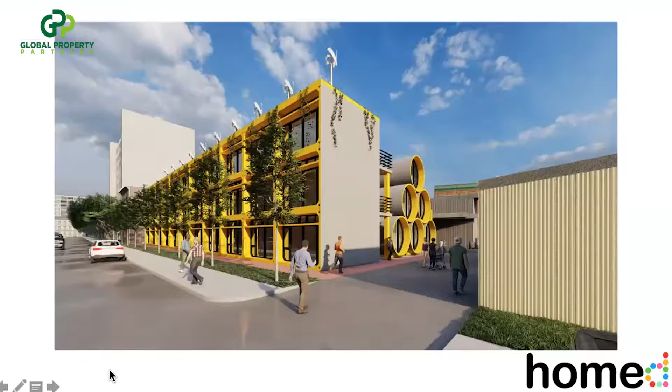Can you see? Right, can you see? No. These courtyard spaces are at the heart of the community. Can you see now? No, you cannot see. We can't see. Can you see this next one? You can't see - maybe you have to refresh your slide. Can you see this one now? You can't see, maybe you have to refresh. Okay, let me stop and then share again. We missed a lot of the slide. Now we are seeing. You might have to run through from the beginning, kind of summarize. Okay, well I think it's the internet speed that's precluding us from showing it smoothly.

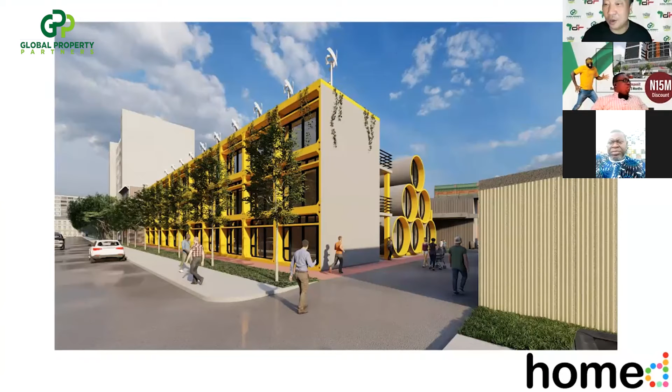But this is another project we're doing in Vancouver. This one is a project that involves a women's charity - a settlement for women who are in danger.

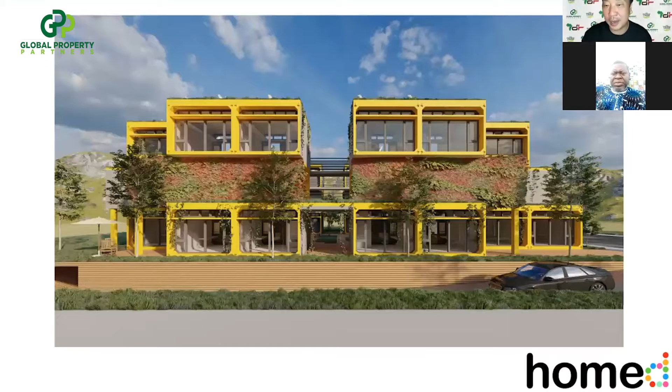Projects we're doing in North America. So I think that's my presentation.

I just want to conclude by saying that I think everywhere in the world is in need of innovation, especially in the way we build our communities, our cities, and our buildings. I believe the new generation of architecture needs to have those kinds of innovations. It's almost that new generation of architecture should be a technology that alleviates suffering for many different aspects of life anywhere in the world, and that's the kind of thing that we're working on.

Specifically for housing, we have HOMED to do that. And then for innovative buildings and design, we have James Law Cybertecture, which is my architectural firm. So that's my presentation today. Thank you very, very much. Thank you.

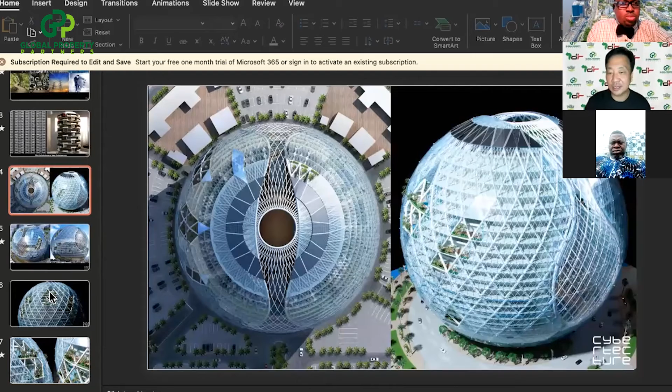I'm just worried the slideshow is going to break down. So, these are the slides. Did you see this one before? No. You can go on. Can you see the next one? No, we're still at slide 4. Okay, it's going now, I think there's a problem with the internet. I think it's better to see it like this. Okay, go on, I think it's just easier to see it like this.

So this is the... go on, this is a city project. This is some of the architecture projects.

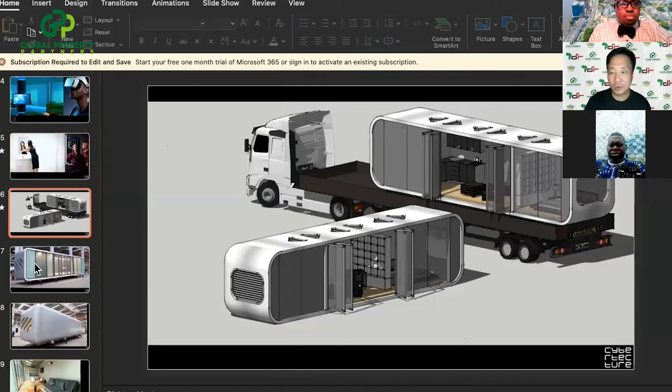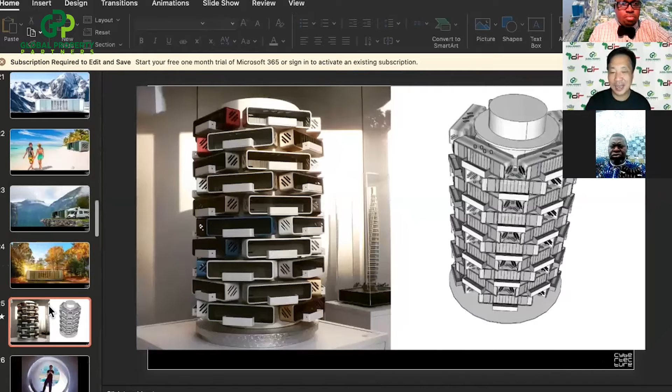This is the pad in Dubai with virtual reality, with the smart mirror, with the mobile architecture, and the freedom to live in different places, and the future of high-rise buildings, using concrete water pipes to create affordable housing.

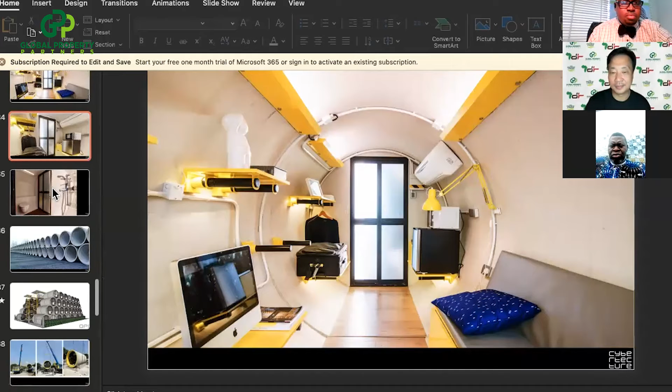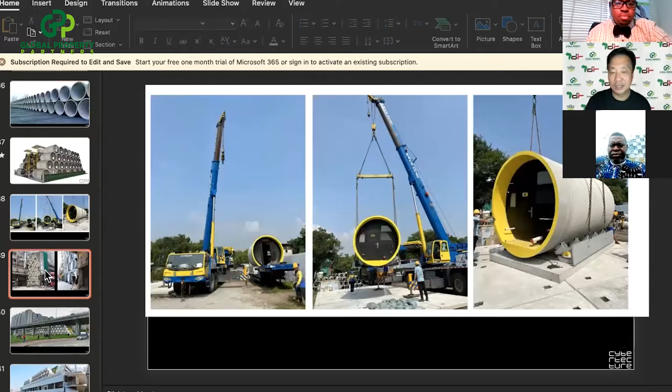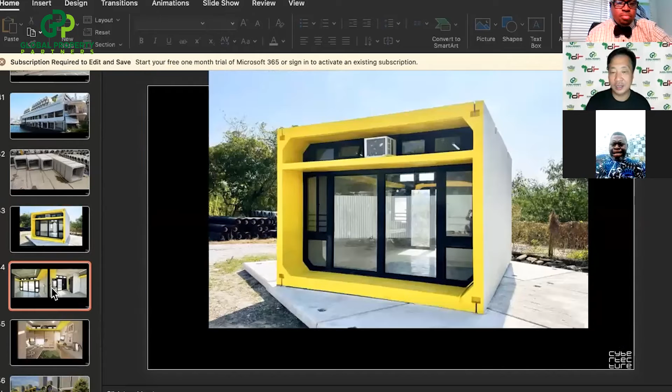And here are the interiors. We can stack up the buildings to become high-rise buildings. Lovely, very lovely. It can be placed in many places, including on the highways. And we also have a square version made out of concrete box culvert.

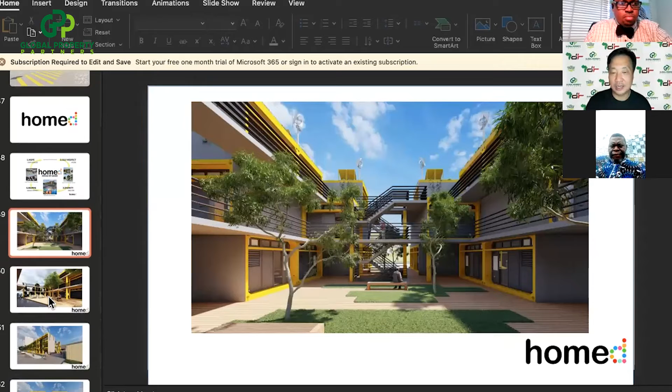And this is our project in Hong Kong. And we have Homed, which has a circle of good. And these are our projects at Homed in Vancouver.

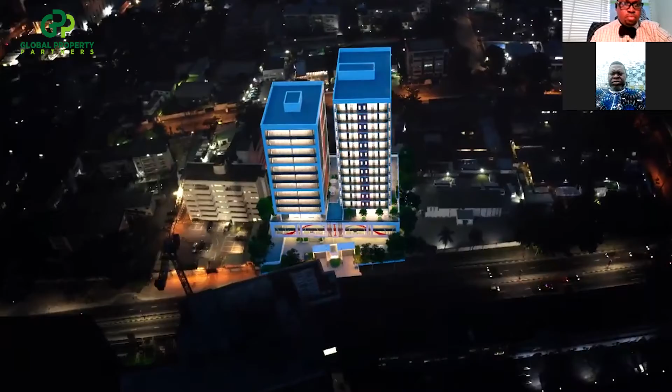Located in the central business hub of the historically rich and culturally diverse city of Lagos, Nigeria, it is a magnificent and modern architecture that emulates the spirit of its vibrant and urban city. Introducing the Pacific Lagos. The iconic mixed-use residential and commercial luxury high-rise is destined to be the first in its class in the center of the eclectic metropolis. This is refined urban living at your doorsteps with exquisite amenities of a high-end high-rise. The Pacific Lagos is an exclusive development designed to stand out when it comes to the luxurious lifestyle in Lagos. The Pacific Lagos. Live, work, play.

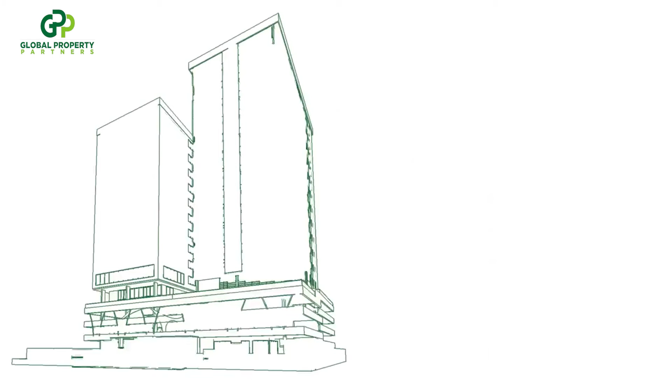Welcome to the future of real estate investment, the Pacific Lagos by Global Property Partners. Who are we? Global Property Partners is a member of Cavalli Business and Investment Group, a fast-growing company in Lagos, Nigeria, and we have associates all over the world in the UK, UAE, USA, and we are spreading our tentacles more. Global Property Partners is an investment firm with a core interest in real estate and investment partnership, and we also have a little bit of interest in energy.

Our mission: we are here to create avenues for individuals, corporate bodies, organizations, Nigerians in diaspora, even foreigners, to generate revenue and to more or less improve their financial worth.

Why the Pacific Lagos? Pacific Lagos is a platform whereby people, organizations, or corporate bodies with interest in real estate can take advantage of to generate the kind of revenue we are talking about. We've actually looked around and discovered that we don't really have much of hotel apartments in Nigeria, unlike when you go to Dubai or the UK. So why don't we bring that concept into Nigeria, whereby you can buy a hotel apartment, 1 or 2 bedroom, and run the short-let kind of real estate business with it. At the same time, we're also looking at a situation whereby we can help improve the real estate industry. That's why we have Pacific Lagos.